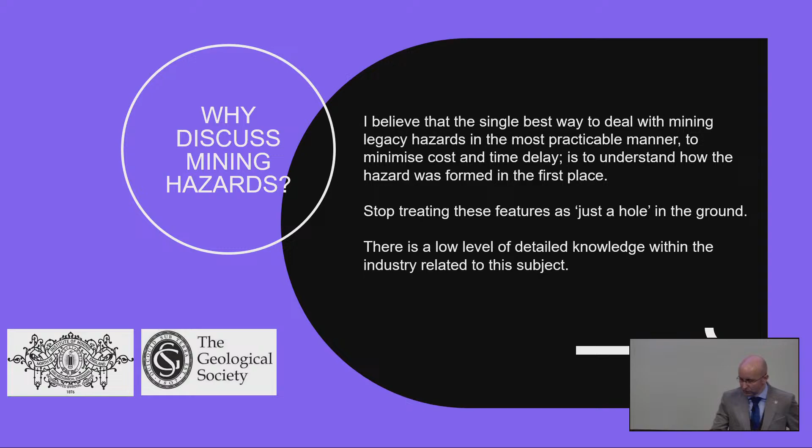Okay, I always start with this. If you've seen me talk before, I always put this quote, at least the one by Galloway, especially as I'm here, because Galloway talks very fondly of this part of the world. Essentially, we wouldn't have the modern world were it not for coal mining. I won't read it out, but I think a lot of people forget that.

I gave a talk last year, perhaps about 18 months ago, in Leeds. Very similar talk to this, so I apologise if you were at that one, you're going to get the same one again. At the end of the talk, two young people in the profession came over to me and said, that was a really interesting talk, Scott, thank you for that. Loved looking at the plans, very interesting, but why is this such a big deal? And I kind of said, what do you mean?

They said, we don't get this. You've been talking about coal. Was coal a big deal in this country? Yeah, you see, but you laugh. But then think about it. That means we've got a generation of people joining the engineering community who don't understand the significance of this.

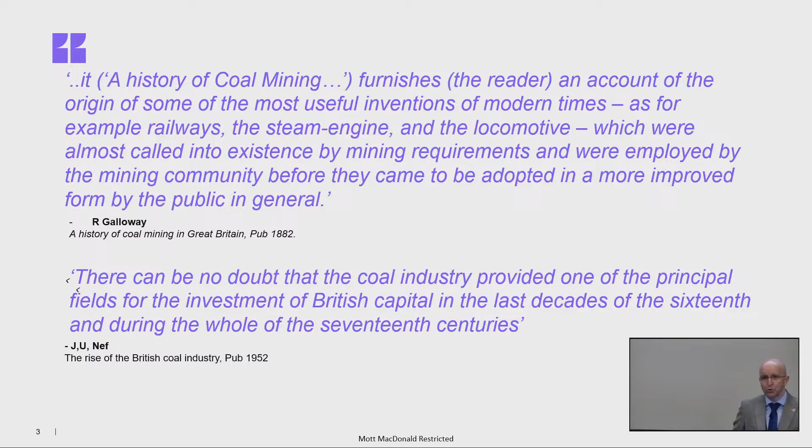And I know I never worked in a mine. I was never trained as a mining engineer, but I've tried to pick this up, and I think we need to remember that when we're looking at problems. I'm sure there's consultants in the room who deal with clients, internal colleagues and peers, who struggle to understand what we're talking about and why this is such a big issue.

And I'm very conscious of time. So a few... oh, is that me again? Ooh, brave. So UK mining dates back to the Neolithic.

I won't go through all of this here. I think there's a few important things we need to talk about on this slide, which is that coal mines started as surface winning or small pits and then progressed. And really, as I'm sure most people know here, it was the Industrial Revolution that really got coal mining going in the UK.

In addition to coal mining, there are other minerals that were mined, and it's important to remember, and I'll try to touch on this later, that there were other minerals and other materials mined with the coal. So when we're talking about underground mining, we might not just be talking about the thickness of coal that you can see on a geological map.

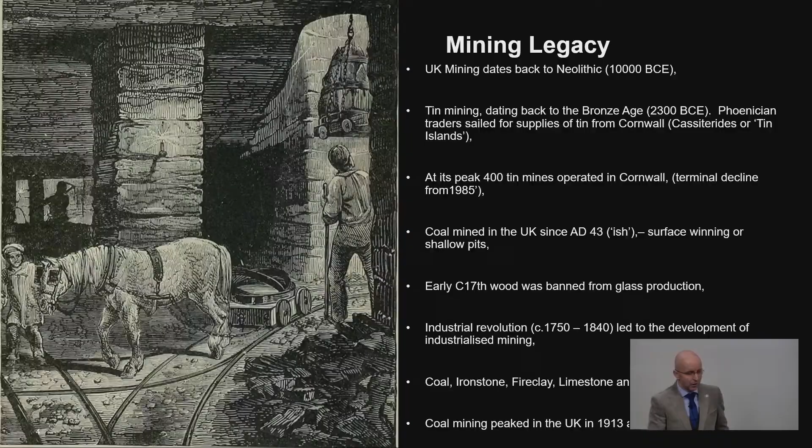Okay, so it was a long time ago, but what sort of hazards?

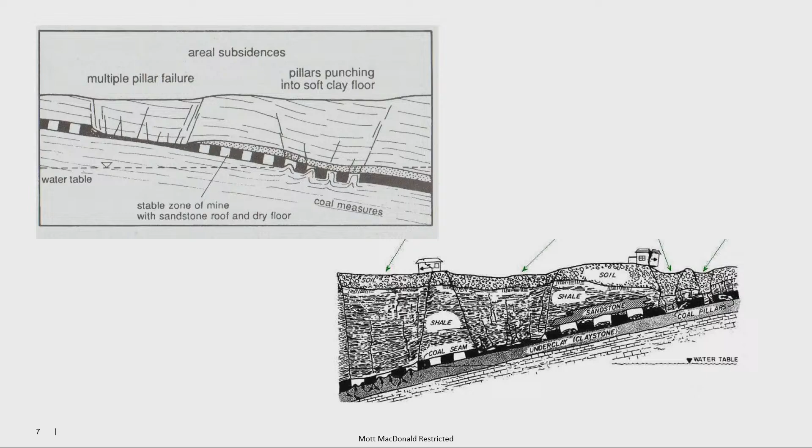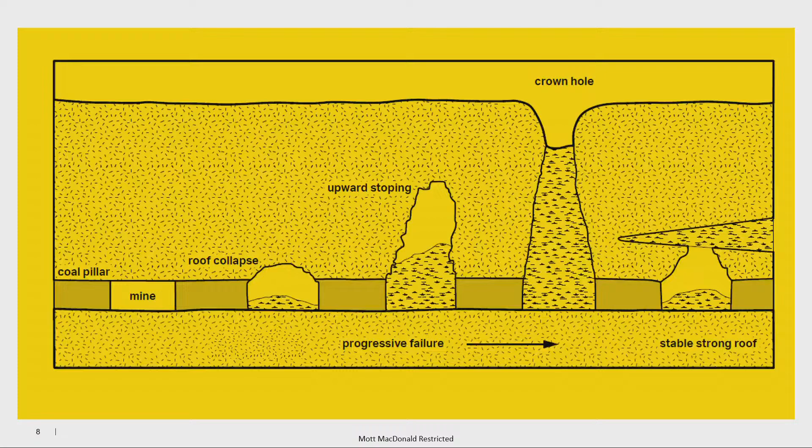Again, just to illustrate the point further, crown holes - this is what a lot of people in the industry think about. Crown hole failure is what a lot of people in the industry, in consulting, that's the immediate go-to when people talk about mining subsidence. It's this sort of manifestation, something that is relatively small, very localised, and potentially a lot easier to deal with than some of the wider subsidence troughs that we saw on the previous slide.

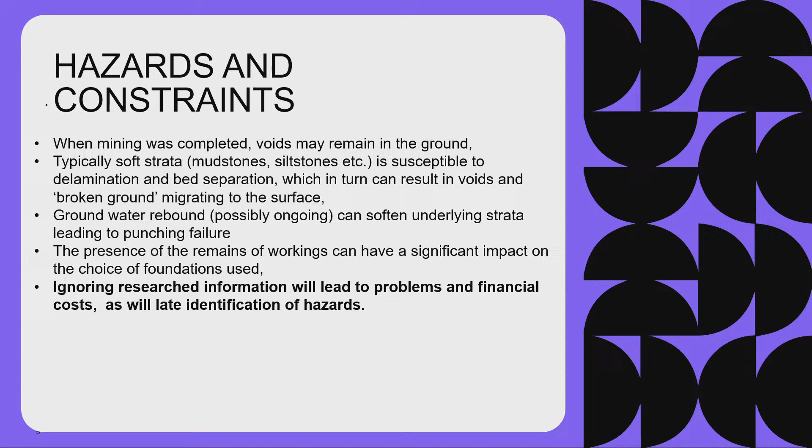So just from the previous slides, we can say that when mining was completed, voids may remain in the ground. We've got a water table on that bottom image - actually, we've got a water table on both images. And it's important to consider that.

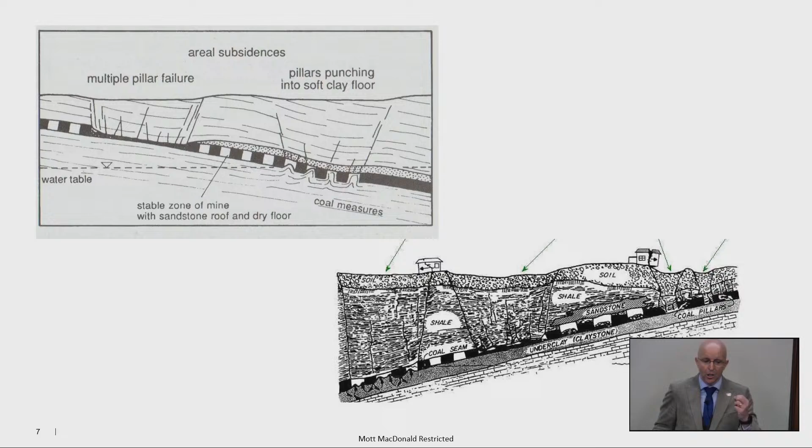One of my interests is looking at old mining textbooks. I'm convinced that if we read the old textbooks about how to actually drive these mines, and I'm talking as old as I can possibly find, we can understand what we're looking at as engineering geologists, civil engineers and consulting engineers, and we can try and work out how best to investigate them, where best to put boreholes, where not to put boreholes, where subsidence may be at its maximum point or where it may not have occurred at all.

And so what comes across in a lot of those textbooks, which is something that I perhaps hadn't really thought about until I really got interested in this 5 or 6 years ago, is that as an engineer, I was always told that mining subsidence was about the roof coming in. And that's not the case.

It seems the large majority of problems with mines, especially in pillar and stall workings, was the floor coming up rather than the roof coming down. That problem would have greatly increased where we've got the water table.

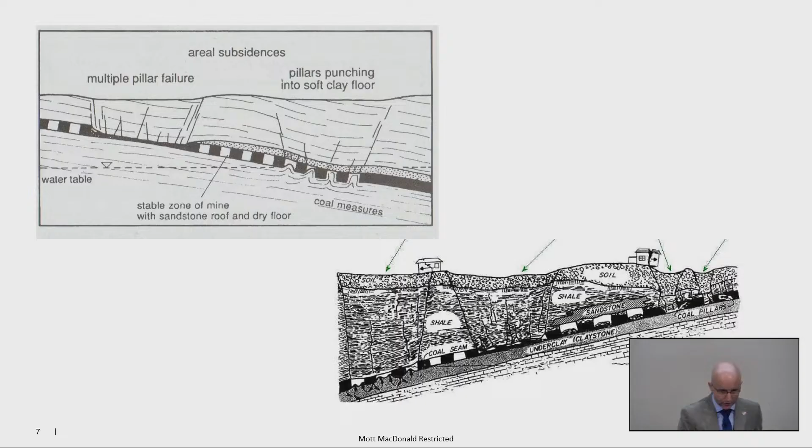Obviously where we've got the water table and we lower it through artificial pumping, that problem goes away temporarily. We switch the pumps off, the ground responds, we get a ground response. This will run through the thread of the talk.

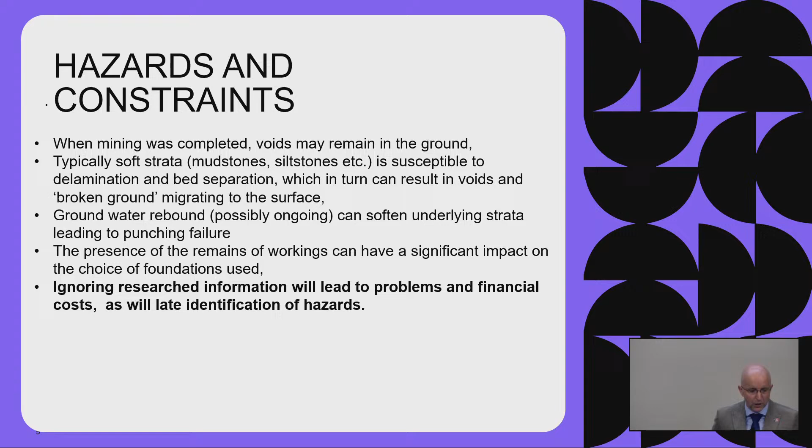Has that ground response completed now? We finished mining a long time ago, predominantly in this country, but we're now seeing groundwater rebound, and I think there's a chance we might start seeing problems we haven't seen before, associated with that groundwater rebound. An obvious point, but the presence of workings will have a significant impact on the choice of foundations, for better or for worse.

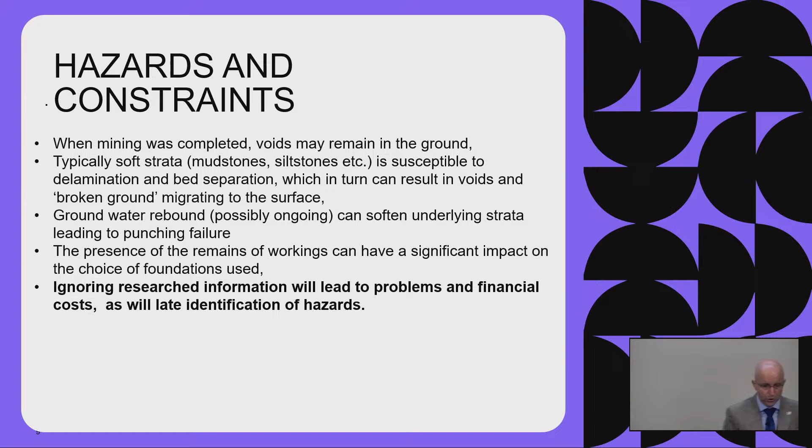One of the first takeaways for this evening, if this is something you're unfamiliar with, is that if we ignore the information in front of us that we can go and research in these sorts of environments, with these geotechnical and geological constraints and hazards, they will come back and bite us. That's been proven on numerous projects over many, many decades.

This is the common thing in consultancy: we've got 10 times the seam thickness, it's not a problem. There's some mining there, we've got enough thickness.

So if you're not aware of the 10T rule, I'll come on to it later on, but essentially there is a rule of thumb - I know some people in the room might have been present when this was talked about initially - that's been passed through CIRIA SP32 and now into CIRIA C758D, which are essentially the de facto standards for consultants dealing with these issues.

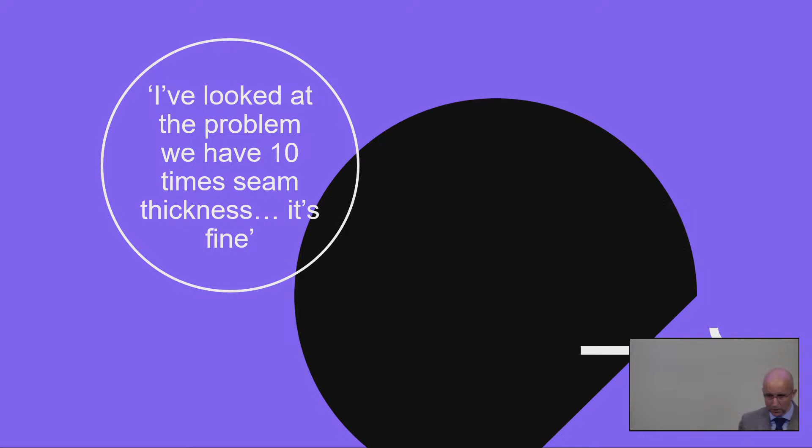That if we have 10 times the seam thickness of coal in cover to the ground surface or to rockhead, depending on your point of view, there's not a problem. I will come back to that.

But before I talk about this - and this is here because I've got nowhere else to put this slide - I can't do this talk without talking about bell pits. So bell pits are the first sort of real underground mining. We find surface coal, we start to win it, we chase the coal into the ground, perhaps going down following the dip of the geology, and then we get into bell pitting.

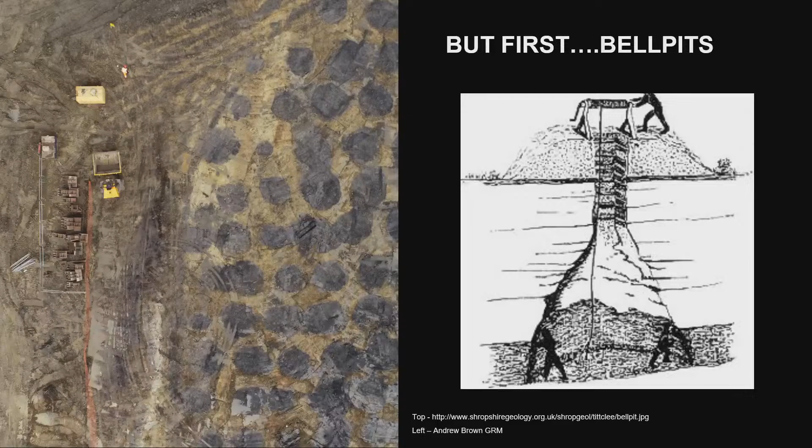But looking at this, you can see the variation in size, the variation in spacing. One of my mentors once said to me that he'd read somewhere that the decision of where a new bell pit would start in relation to the old one was the distance you could throw the shoe when you came out of the ground. Now, I don't know if that's true - I've never seen that written down anywhere, but I do think it's a great story.

Okay, so back on to the thread of things. So let's talk about mining plans. This is just an introduction, and I put this in because I can't find this written down anywhere. This is something that I think should be included as part of geohazard courses in the universities that remain that teach geology and engineering geology. But certainly having this written down somewhere I think would be of great importance.

Myself and Paul are looking at trying to capture some of this for the Geological Society going forward over the next few years. Ultimately, coal mining hasn't always been a requirement to make plans of coal mines. Predominantly, the early plans were made more from a health and safety point of view - so if you were sinking a new shaft and you were going to work a seam, you knew you weren't going to break into your neighbour's seam and potentially flood your workings, which obviously you were trying to avoid.

As mining progressed, and as incidents and accidents progressed, and as various mining legislation came in, there was a requirement in 1872 to make plans and deposit them. My understanding of deposit means that they were taken to London. If you're in this part of the world in 1872, London is a long way away. I wouldn't even like to consider how many plans never got to London, but I'm sure it's a sizable number. So we've got a whole suite of information that we've just lost because nobody took it to London in the first place. It's important to bear in mind, and this is often missed in engineering consultancy in my opinion, there is a difference between deposited plans and abandonment plans.

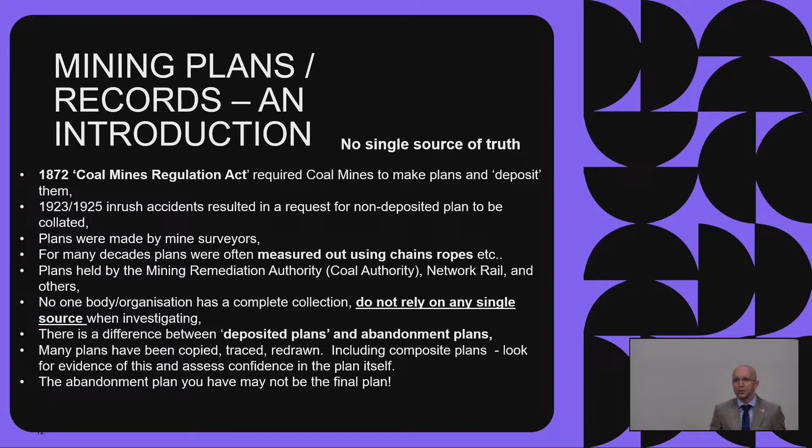And then we start getting into why was that? Well, people could have gone in, there could have been illegal mining, there could have been trespass mining. Somebody thought a shaft was being closed up and they just chanced their arm perhaps one weekend or one evening to go and get a bit of coal for the home fire.

There is an area of coal removed, there are pillars left in place. Depending on where you are in the country, depending on the age of the mine, that methodology may differ. This is why I'd like to go back to the point I made earlier about understanding how the mines were driven in order to understand how to treat them.

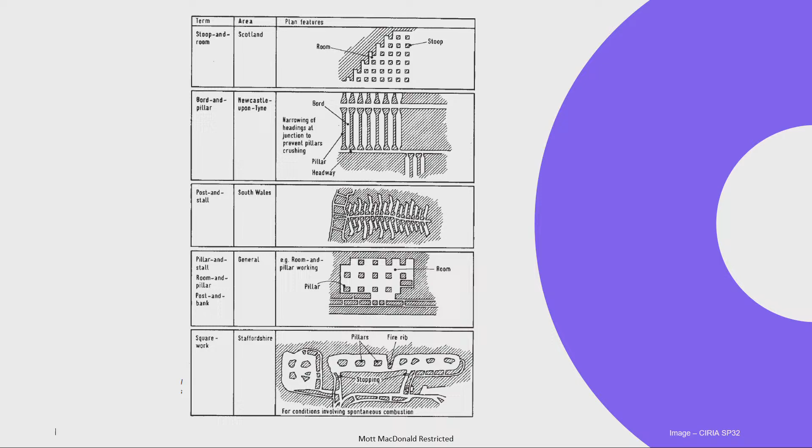Can I interrupt you for a second? Have you ever been in a room with somebody from Sanquhar? No. You have now, there you go. Go on, give us a story then.

It's a mining village, an outlier of the actual coal field. Both my grandfathers worked there. That's fabulous, I'm from Sanquhar.

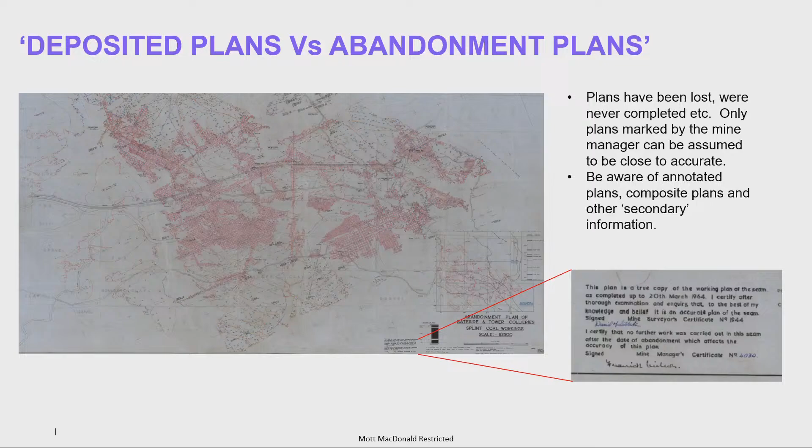Peel, P-E-E-L, goes through how to sink a mine, how to drive a mine, how to work the coal, and how to retreat from the mine. Super book, great book. It's a book that was written for its day, it's a guide for mining surveyors and mining engineers. Fabulous book if you can get hold of it.

So when we're thinking of underground spaces and these mine workings, we need to consider that we've got the workings themselves and then the means of access and egress. And they would be typically very, very well reinforced, even going back pre-mechanisation. Peel has a whole chapter in the book about how to preserve wooden props to make sure they last as long as possible. Fascinating to read, but the point is that these things were built to last. And so I would challenge people who say, oh, it's all right, it was 120 years ago, it's not a problem, it'll all have collapsed. Don't be easily convinced and don't be easily fooled.

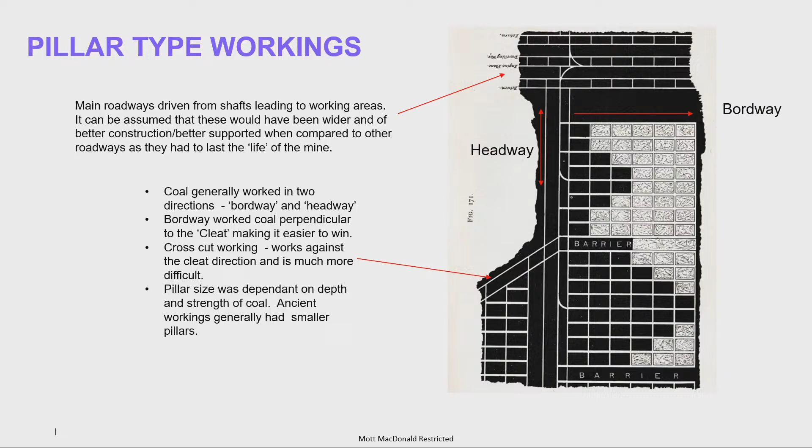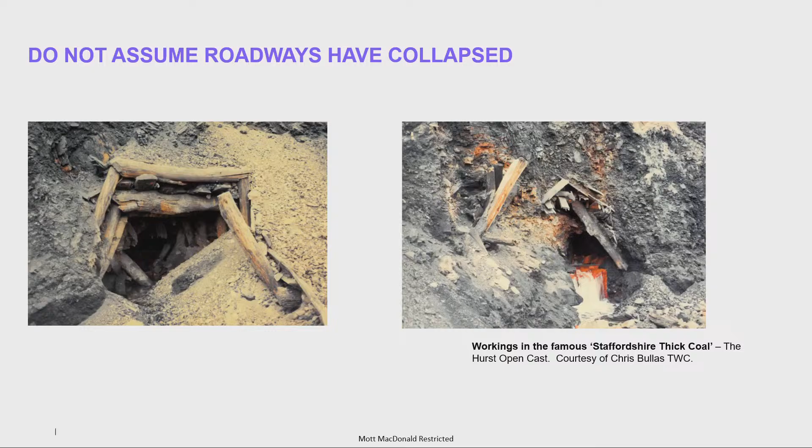Those photos were taken in the mid-1990s in the Staffordshire thick coal. Those are substantial props on the left-hand side. And no, it's not as open as it originally was. But if you were in that area and you were undertaking a ground investigation and you'd missed that with the borehole, and then you proof drilled and grouted or you did something else, that could really come back and get you. So if you've got a plan with a roadway on, think about targeting the roadways in any ground investigation.

So something interesting here that I didn't come across until quite late on is the idea of dividing the workings into districts and having coal barriers between them. This was predominantly to stop fire and to limit the risk of any explosion spreading throughout a whole mine. Again, this is one of those things that once you've got your eye in, it's quite easy to see on the older plans.

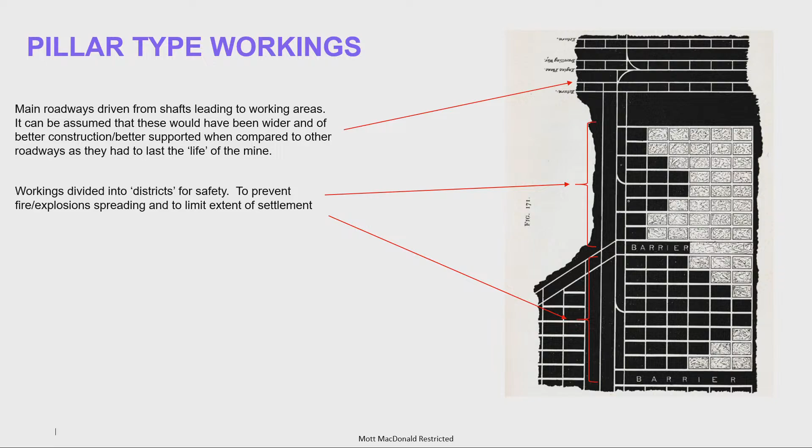I think I've got another shot of that, and again, the workings being packed.

Right, I'm open to discussion at this point, maybe not a long discussion. Pillar robbing, second workings, pickings. For a very long period of time, until quite recently, I considered pillar robbing to be something a bit ad hoc, undertaken to chance their arm, to get a bit of extra coal. I'm now coming round to the idea that pillar robbing and second working are the same thing, that these mines were designed to be reworked on numerous occasions.

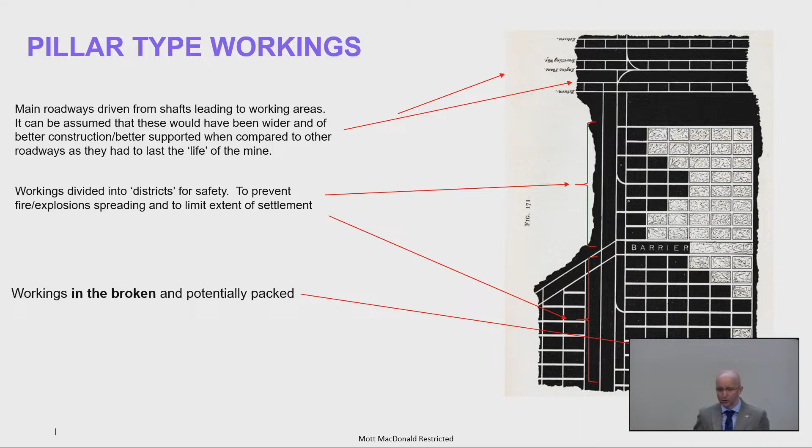We can see it on plans, we can see it on opencast sites - I've got a photo in a moment. So the concept of pillar robbing and second working is that we start off with something that looks like that, and we take the coal out. And then we go back and take a bit more coal out.

In the Black Country, I've got a couple of plans - they're not here because I'm still not 100% certain what I'm looking at. But I think I've got evidence of the thick coal in Staffordshire being worked six times, where you can map out roadways that have gone in, that have cut through previous roadways, that are then cut by later roadways.

So what does this mean from a geotechnical point of view? If we're looking for coal in a borehole, we have to think about the percentage extraction of coal. And I know there was a case, quite local to this, where extraction in a seam was quite an important point. We really do need to think about extraction of coal and how that might manifest itself in any boreholes we take, cored boreholes, and whether we're using cored boreholes versus rotary open holes.

And the quality of the drillers that we use. We need to make sure that we have people on site who know what they're looking for in the boreholes, and make sure that the engineering staff on site know what they're looking for in the boreholes.

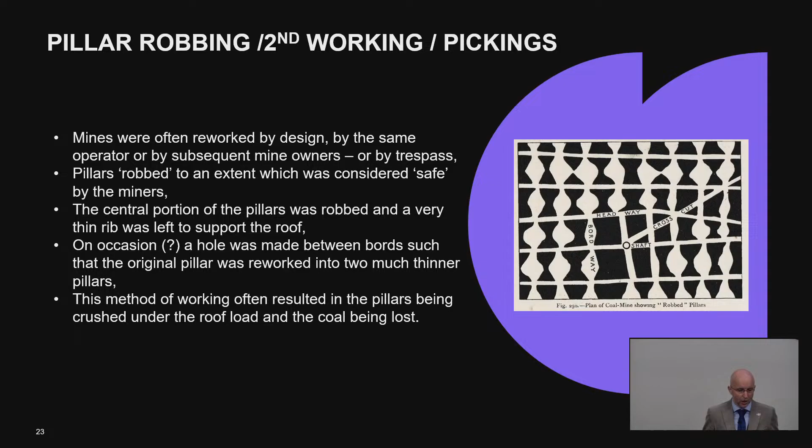I had a site recently in Derbyshire where the mine plans show that the coal has been completely taken out, and that wasn't necessarily reflected in the borehole investigations undertaken by others. Trying to work out whether the plan was correct, or whether the boreholes, which were just open holes, had possibly been logged incorrectly - very, very challenging.

So pillar robbing, second workings, anything like that - if anybody's got any stories afterwards, I'd love to hear them. And just so you know what that looks like in practice, thank you to a younger version of Paul Roberts for this photograph.

What we're looking at here is an opencast site where the overburden's been taken off. We've all seen photos like that before, and yes, it's obvious it's all been nicely cleaned up before they start working the pillars. But the important thing here to look at for me is between the foreground, the middle ground and the background, the change in the shape and dimensions of those pillars and their footprint.

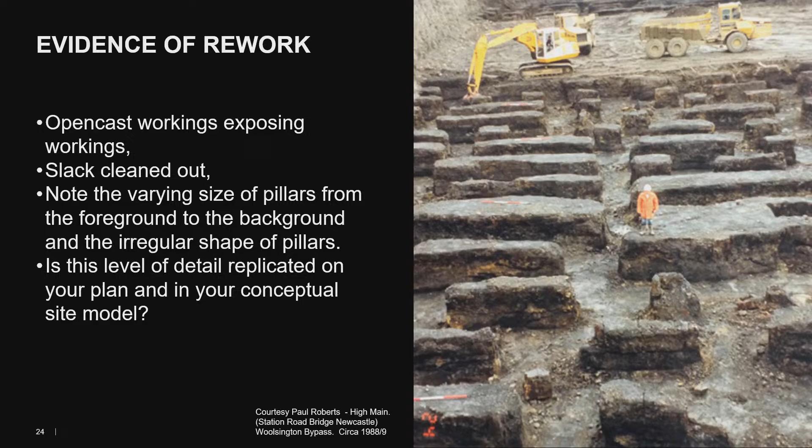For me at the back, potentially some of those pillars have already been taken out. But then as we come through we can see cutouts in the pillars, and we can see those second workings and possibly later workings - this is completely different to what might be on the abandonment plan. We need to think about that when we're looking at borehole records.

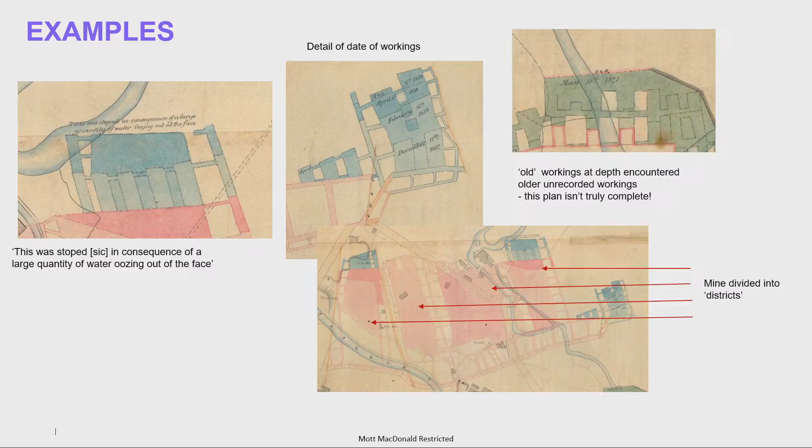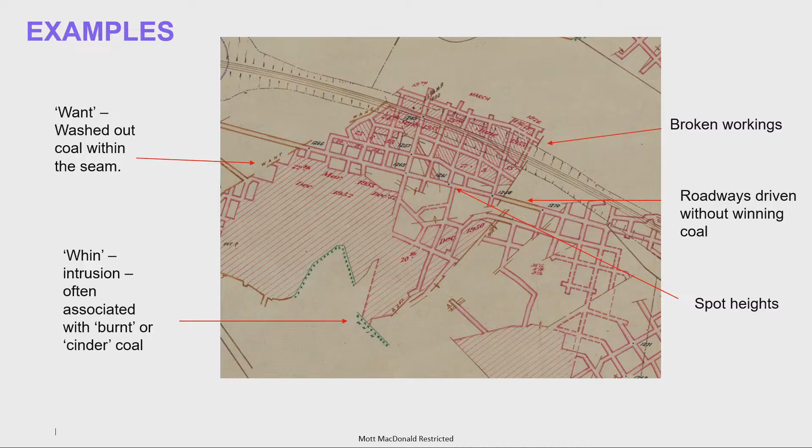At this point I should point out that a lot of this information comes from a very good source, and I haven't got the reference, so I apologise - if anybody wants it, find me on LinkedIn. There is an NCB coal board book for surveyors which describes how to draw these plans, and if you haven't got it and you work in coal mining country, get a copy, because it's the book that is missing from the industry completely. I intend to get a lot of that information republished through the GeolSoc over the next 18 months or so. We can also see a geological intrusion, marked by the green there, and we've got some spot heights.

Lovely plan. I was talking to somebody earlier about this, actually - coal would have been left in places to protect structures at the surface. I have spoken to old surveyors, old miners, and I'm sure people in the room will have an opinion on this, and I'd really like to hear it later, about just how much coal was left in some of these pillars, and whether a few pillars may have ended up being a little bit smaller than perhaps they're shown on plans.

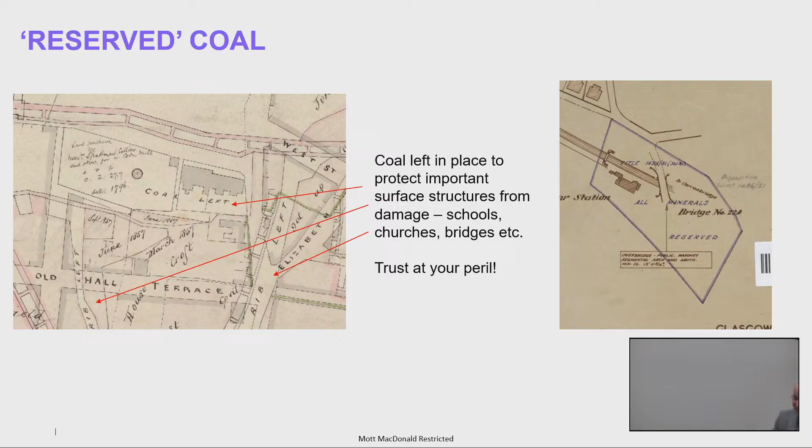I can say it because it's not here, but I live very close to Himley Hall. Himley Hall in Staffordshire was the NCB headquarters for a number of years. The abandonment plan for Himley Hall has the historic church where I got married on it - it's on my wall at home, much to my wife's annoyance. But what it does show very nicely is a massive pillar underneath Himley Hall. I was talking to one of the surveyors who worked at Baggeridge Pit, which was the largest pit in the area many years ago, and he said to me, 'oh, we took most of that pillar out.' And that was the Earl of Dudley's coal mine. It was just so fascinating - again, I'd love to talk to people about that if they've got any experience.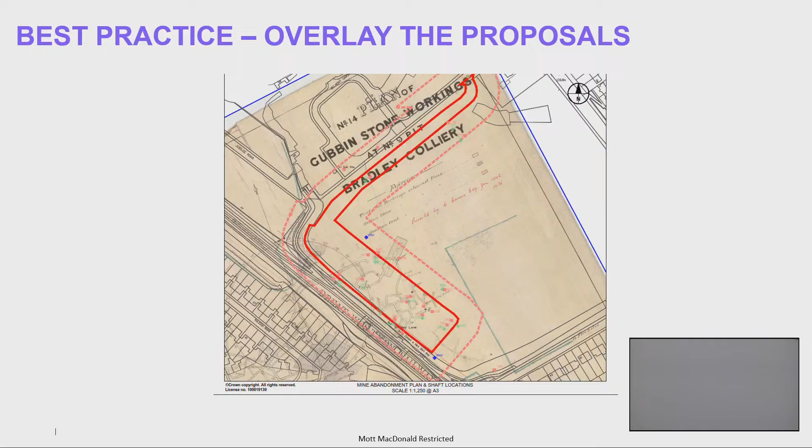This is great, but what do we do with it? We've got plans, we can interpret them, we've talked about GI, but what else should we be doing with them? We should be overlaying whatever we're going to do at the surface to try and get a better understanding. This is a great plan - I should credit this as an ACON plan, so thank you to ACON for letting me use this one. We can see workings underneath the car park here. They don't extend over the full footprint of the car park, but they are there and they need to be considered.

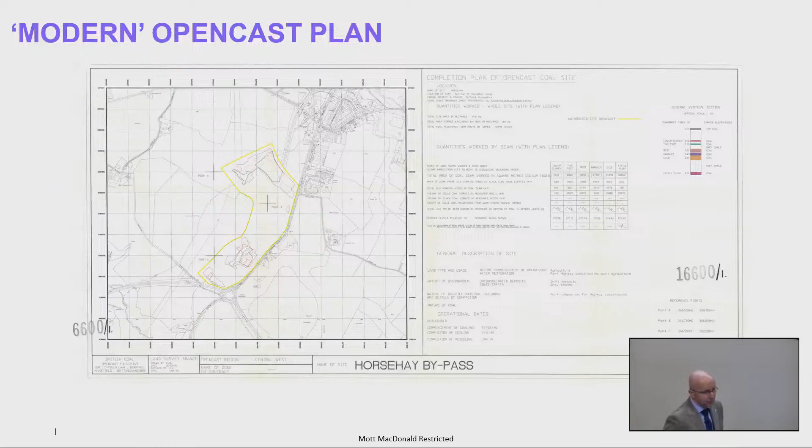Then we move on to modern open cast plans. This is in the Telford area, and we can see an open cast site - if you've not seen one of these before, the little polygons within the yellow site boundary are workings that were encountered at depth in that open cast site. It is possible, if you're really nerdy and really interested, to get one of these plans, try and find the corresponding seam plans, and see how they compare to what was found in the open cast. If you can get it to match, let me know, because I've never managed to get it to match so far.

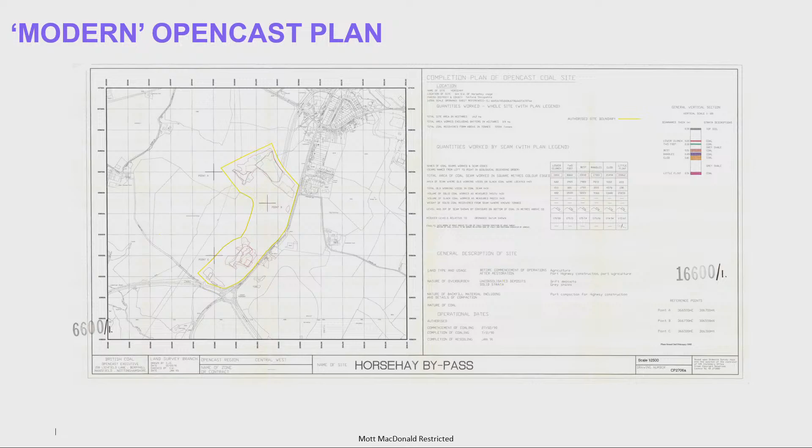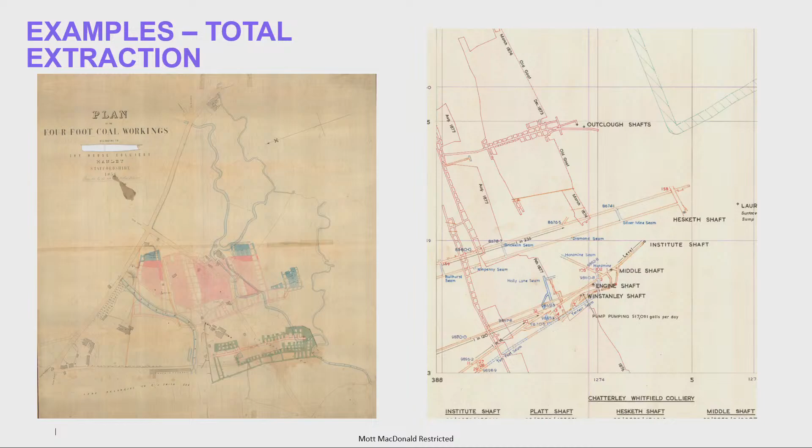That's just the same slide again, so I won't go over that one.

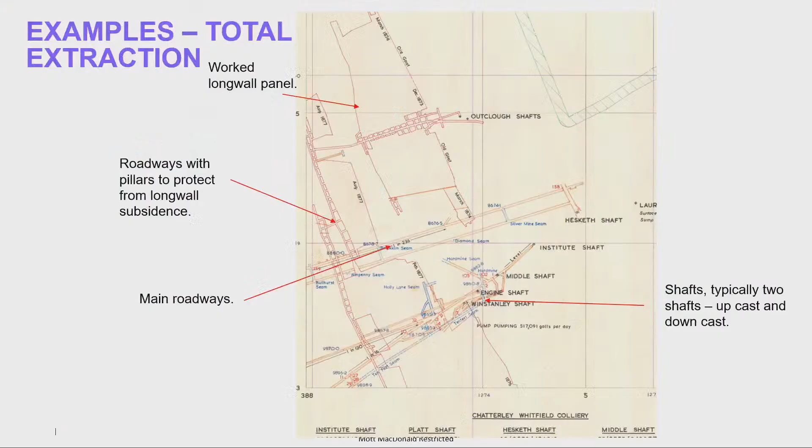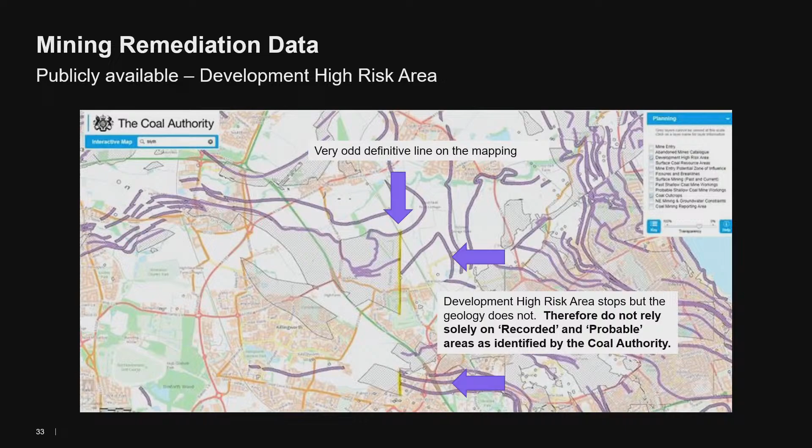There we go - so the development high-risk area stops. Now, as geologists and engineers, we can all see that's probably not the case. I've got to defend the Mining Remediation Authority here, because this is a wonderful resource, and they don't purport to know everything. But this is quite clearly where their records stop. It's important to bear that in mind - you need to look at the holistic area when looking at some of these problems, and really consider what the problems might be. Because it would be very easy to interpret this and say, I don't need to do anything on this side - if I'm on the right-hand side of that yellow line, I haven't got a problem. It's fine.

Right, this is where it gets fun - the 10T rule. This is, in my opinion, a blanket approach to assessing the risk of mining voids reaching the surface. Now, I should stress before we get into this, anything I say here is really only in relation to workings other than longwall workings. There's a discussion to be had about longwall workings and the 10T rule, particularly pre-mechanisation longwall workings, where perhaps collapse and closure didn't occur quite as well as it should have done.

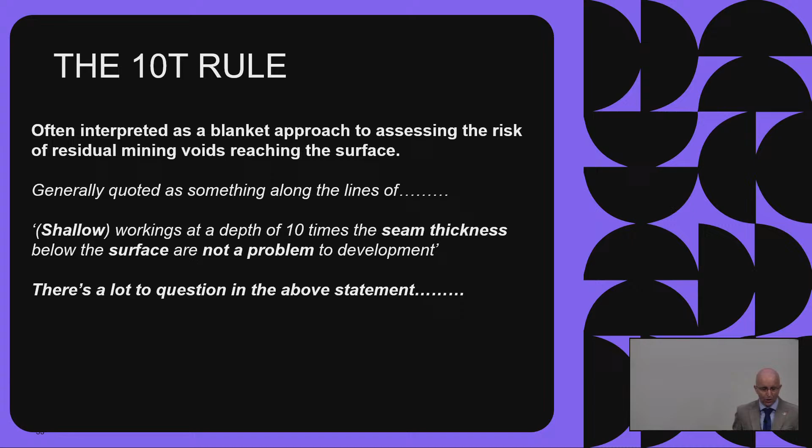Generally, the 10T rule is quoted as being shallow workings at a depth of 10 times the seam thickness below the surface are not a problem to development. So from that, I'd like you to think about shallow workings, seam thickness, and below the surface. So what's shallow? The Mining Remediation Authority classes shallow as being 10 times the thickness of a coal seam, down to a maximum depth of 30 metres from the surface.

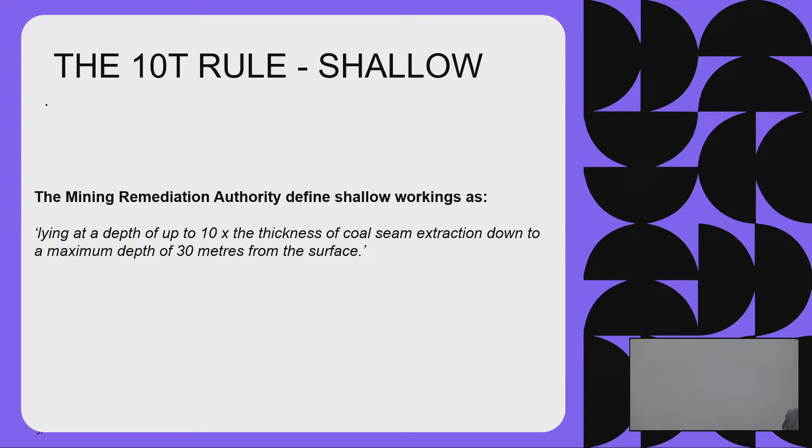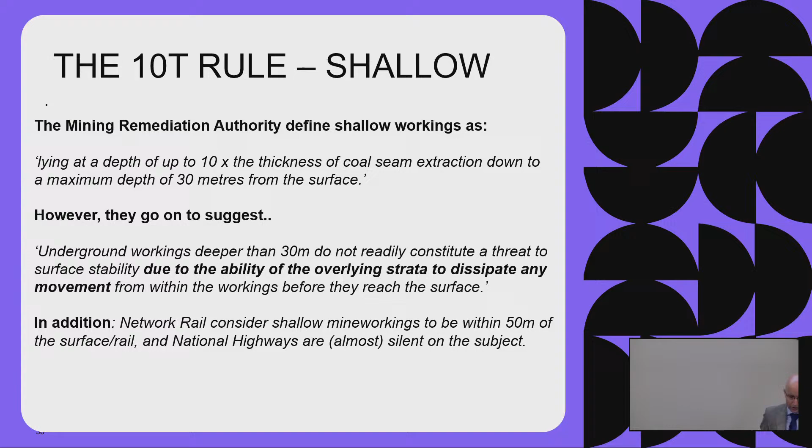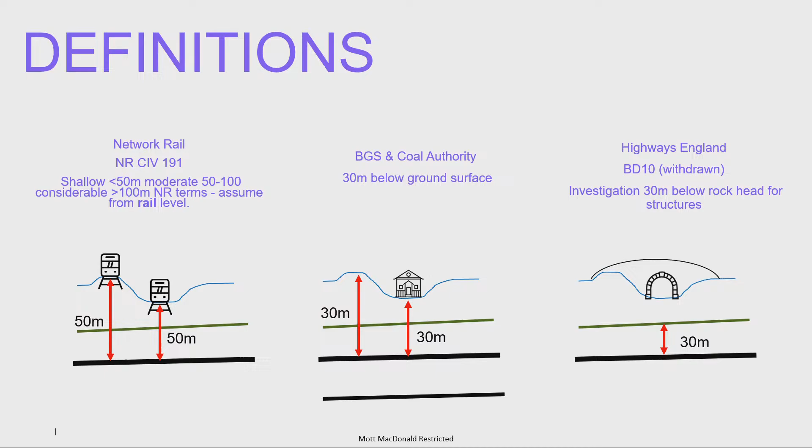They go on to say that underground workings deeper than 30 metres do not readily constitute a threat to surface stability, due to the ability of the overlying strata. Network Rail consider a slightly different number, 50 metres. So we've got shallow workings defined by three different organisations, all different. So that's confusing, isn't it? And I particularly like the Network Rail one, where we have to think about what we're doing with embankments, and where does an embankment get big enough to actually be a problem. I haven't got an answer for that, to be honest, but it's something we need to be thinking about.

This is something that has come about from much debate and looking at old books and discussions within my peer group, who all like this sort of thing. Worked thickness, the seam thickness. So if you're a geologist starting off, if you've never done this sort of assessment, you read that previous statement and it quite clearly states the seam thickness - that's the number you need to be thinking about. So in most cases you'll go to a BGS map, look at the seam thickness, and do a 10T calculation. If your seam thickness is fairly minimal, you've probably not got a problem.

But what people forget repeatedly is, if we go back to those pictures of the timber props and the open workings - yes, let's mine a 30 centimetre thick coal seam, great, but you've got to get there. And that's the bit that gets missed time and time again. So we've got a 30 centimetre coal seam, we've sunk a shaft, we've driven an adit to get there, however we've got there. We then want a stable means of relatively long term getting to the working face and back, pushing a cart. I'll come on to the cart bit in a minute.

So how big is the working? We've got a reinforced section of the seam that has got timber props, stone props, or a combination of the two, holding everything up. We need to take that into consideration, especially if we're doing remedial works, because if we drill into that roadway and it is still stable, it will take a lot of grout. And equally, some coal seams may have had two roadways at different levels - that's worth thinking about as well.

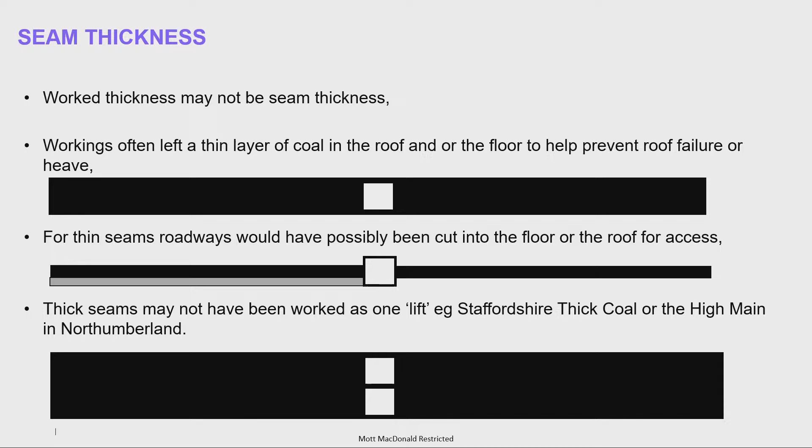So how big is a roadway? Now, a lot of this I need to thank Keith Nichols, ex of Network Rail - Paul's chuckling because this is one of his slides. I describe very crudely the height of the roadway as being the height of your wife pushing a tub. I know that's a bit humorous, but I think that's fairly close when we're talking about old workings, and it's borne out in some of these images we can see.

So we've got the miner at the face doing the mining, and his wife pushing the cart full of coal to the bottom of the shaft or out of the adit. So surely you would only make the roadway as big as it needed to be to facilitate that - we're probably talking, I don't know... there we go, that's me being a 17th century woman pushing a cart. Something like that, perhaps. But if you've only got a coal seam like that, suddenly your calculation, your assessment has completely gone out the window. Very localised, admittedly, but if you've got a coal seam with a lot of roadways crossing each other, this is something we really need to be thinking about.

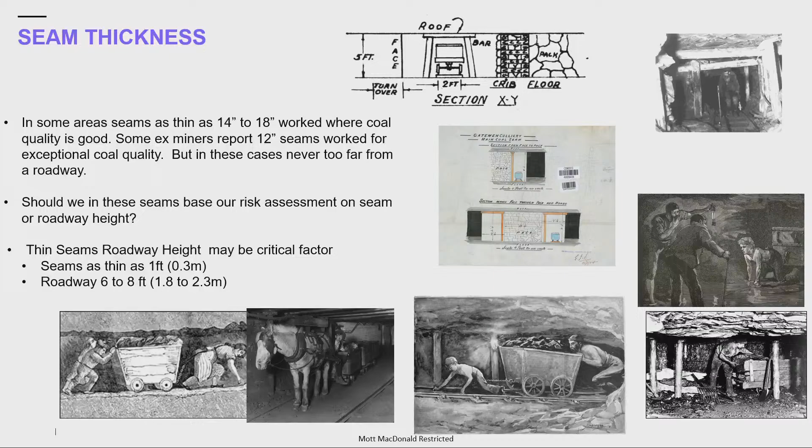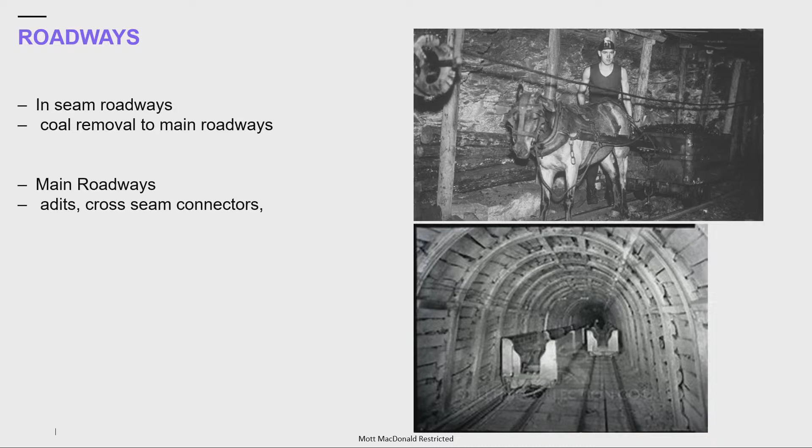And then we get to this level of roadway, and this is, especially the one at the bottom, much more modern, sizable construction, very well reinforced, potentially going to stay open for a very, very long time.

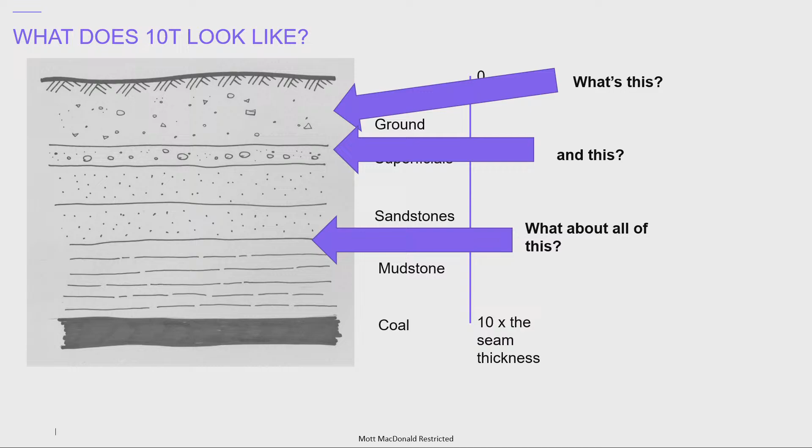So if we go back to a very simple ground model - apologies for the crudity of the image here - we've got a simple section of strata with some coal at the bottom. I did realise when putting these slides together that what's missing is a roadway, so just use your imagination a little, perhaps there's a roadway at the bottom in that coal seam that's a little bigger than the coal seam itself. So we need to consider what the superficial materials are, the interface between the superficial materials and rock head, and then the rock itself when looking at this.

And then we need to think about what we're going to build, and that's really, really important. What sort of foundation - putting aside the tunnel or whatever we've got on the bottom left - what are we going to put into this ground?

Are we going to change the distance between the worked coal seam, the roadway, the foundations, and the zone of influence of those foundations? So suddenly we've got a variation in thickness, variation in the definition of shallow, differing ground conditions, coal seams which may or may not be worked at full thickness, and records and plans which potentially aren't correct. All of this is very vague, and is not something that should have a blanket assessment approach applied to it.

Discuss. What I'd like to say is that we need to keep returning to our desk study, refer to our approach, and if we're on site and something has changed our understanding of the ground, do not be afraid to revisit where we started. My old chemistry teacher used to say the most important word in science was why, and I think that really applies here. We need to be prepared to go backwards and forwards and really test that ground model.

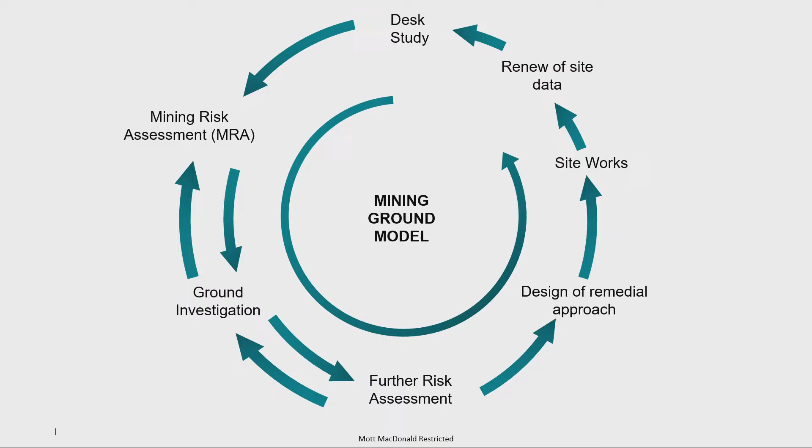Okay, right, pictures of things going wrong to finish on. We're going to finish a little bit, I think, just over the hour, but I think we started a bit late.

So, all very interesting, Scott. You obviously like looking at old plans. This is all old hat. Yep, great, wonderful. What does this mean for me?

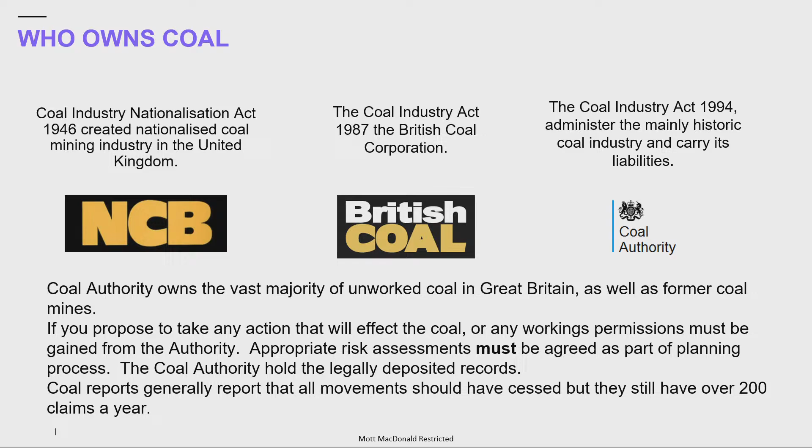So just bear in mind, before we get into the fun photographs, that the Coal Authority, or Mining Remediation Authority as was, owns the coal. If we're looking at other minerals, you might find other mineral owners involved. Because the Coal Authority have responsibility for the coal, they report subsidence claims, and they used to report incidences in a nice little pictorial graphic on the left-hand side. Now, in their annual reports, they just give us a number.

So we've got that information on the right-hand side - I had a member of staff who very kindly went through the annual records from the Coal Authority for many years and totted up the number of hazards and surface claims they came to. You're looking at roughly, maybe, about one a day, perhaps a little less than that, around 300 claims a year. That's interesting, but that's just the claims. The next piece of knowledge we need is how many of those claims were actually coal-related, because some of those things included in the numbers are nothing to do with coal mining. So that's not giving us a true picture of the risk or hazard posed.

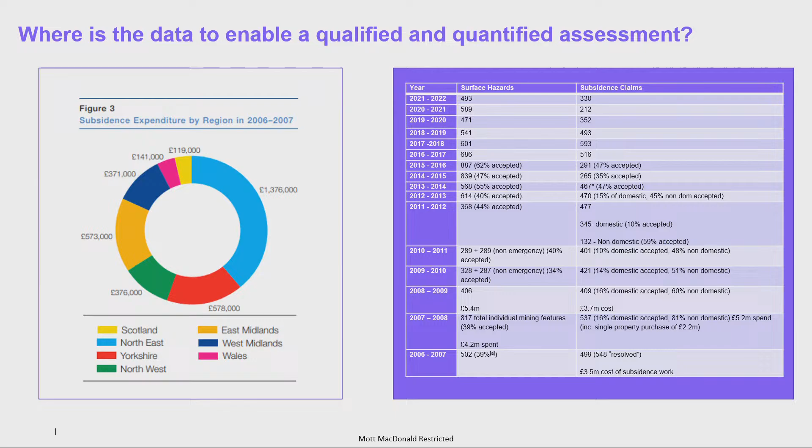But if you go searching on the internet, you've spent your afternoon looking at the Coal Authority viewer, and now you start searching subsidence, you do get a lot of things thrown up. It's fascinating to look at how the industry has responded to the Godstone incident from a few weeks ago. I don't know if they're online, but if you're involved with writing the actual report for that job, I really feel sorry for you, because every man and his dog has given his opinion on the Godstone incident and what could be going on. Best of luck with that one.

Lots and lots of issues. Obviously, if you search the internet, you'll see sinkholes being used as a term when perhaps they're nothing to do with coal mining. But a lot of headlines, and they're very easy to find.

I don't really need to remind anybody here about Bayfield, but this is a slide that's always in this talk for me, because I think it's fascinating. I know several people in the room were involved in the aftermath of this. Terrible, terrible site, terrible problem. I won't dwell on it here, but ultimately reconstruction costs of 3 million - not an insubstantial number for Bayfield, where houses had gone up, people already living in them, when subsidence started to occur post-construction. Terrible, terrible site.

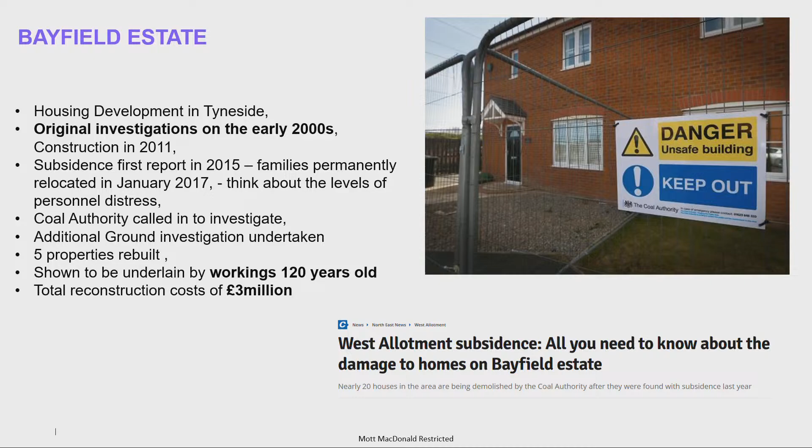Again, exposed workings. This is a site I went to in Stoke-on-Trent about 25 years ago. The site had been subjected to a drilling and grouting scheme. There was a weekend of heavy rain, and suddenly things started opening up - crown holes developing, the road surface going all over, the whole road going up and down. It turned out the drilling and grouting scheme perhaps hadn't really been designed for the ground conditions encountered. It had been designed by others.

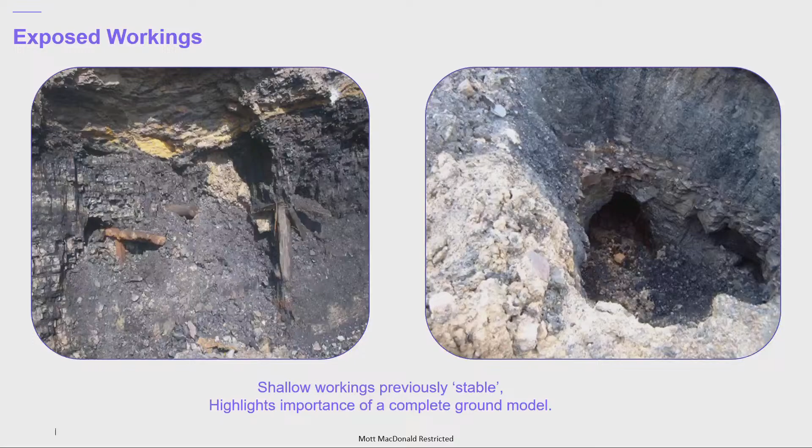It was a historical scheme picked up by the client. The photos on the left show that in a road cut, to try and understand what was going on, we did some trial pits and broke into workings. These were within 10, 12 metres of the surface, and they were still open. If I'd have been foolish enough, I could have walked into that about a minute before it looked like this - it actually collapsed as I was getting my camera out to take a photo, which is a bit of a shame, but you get the idea. You can see the coal exposed there. And then we've got the same photos we've seen before, in the thick coal in South Staffs.

These were workings within 30 or 40 metres of the surface. Something that interests me - if anybody's got experience or thoughts - is that in this instance, second workings have gone in, a whole section of coal has gone out, and the ground has responded almost immediately. The letters were dated a couple of days apart. So we've got workings from 30, 35 metres moving to the surface within 48 hours. So what does the ground look like between ground level and those workings? Has it dropped as a block? Has it deformed as it's dropped? Is it somewhere in between? Could I put piles into that block of ground? Could I dig shallow foundations? These are all the sort of questions we need to be asking.

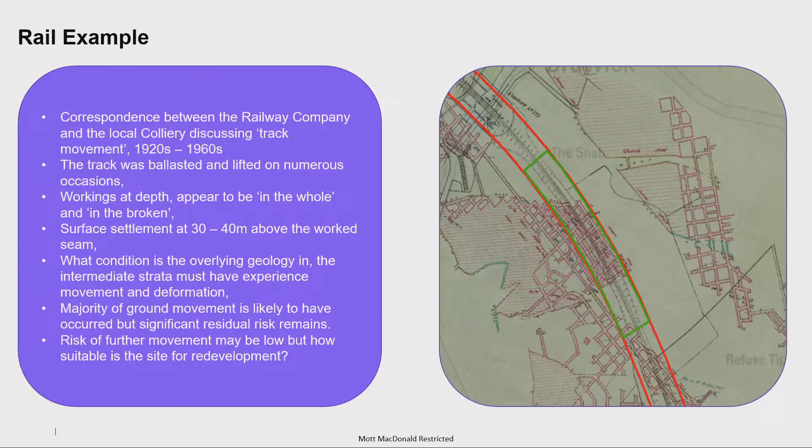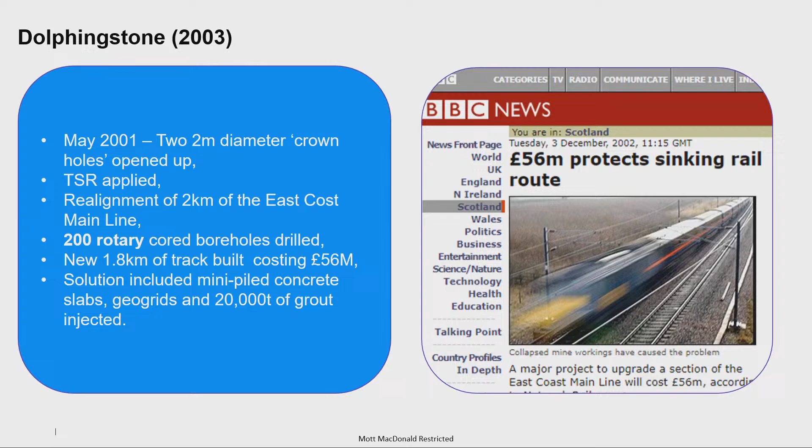Dolphingstone - I must admit this one passed me by at the time, but there are significant numbers associated with it, on the East Coast Main Line. Look at the numbers - 200 rotary core boreholes to investigate this, a significant piece of investigation. I've got no idea what was known about here prior to this, and in defence of Network Rail, I've never actually asked them, but it's a fascinating site.

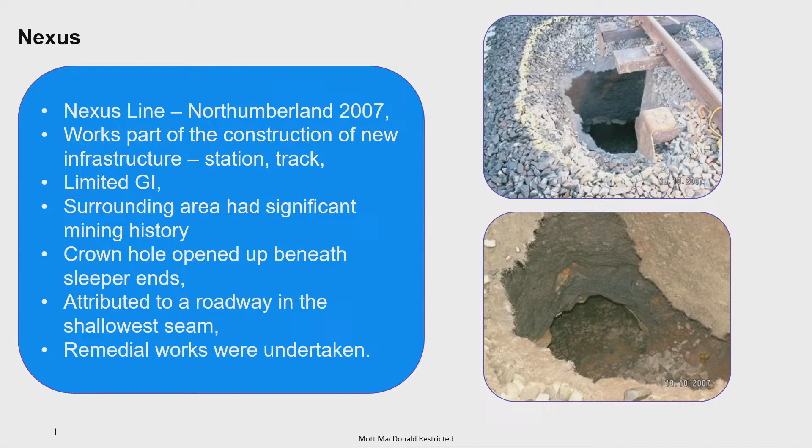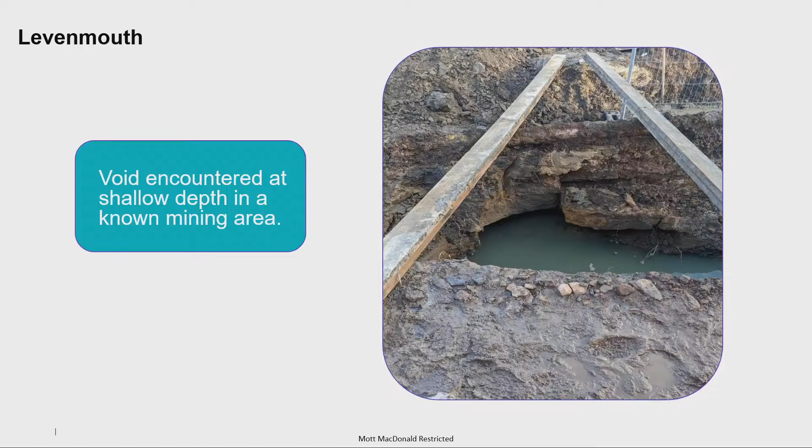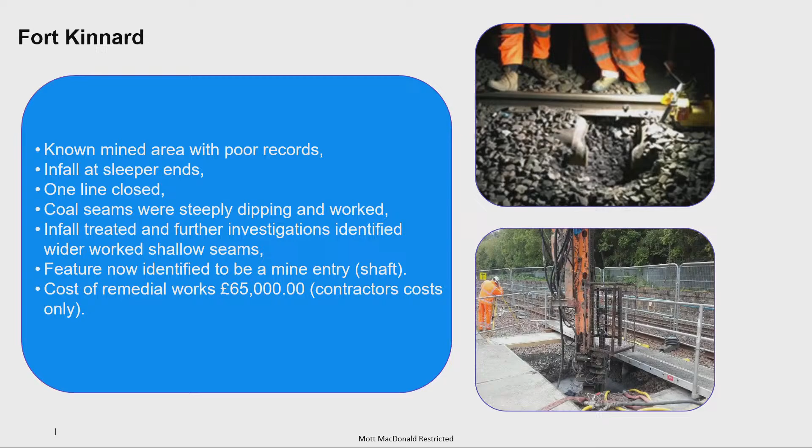A bit closer to home, on the Northumberland Metro, the Nexus, in 2007, there was a problem that needed drilling and grouting. Levenmouth, this was a couple of years ago - again, machine on site, no prior knowledge, bucket into the ground, straight into mine workings. Fascinating. Fort Kinnaird, more recently, a crown hole appeared underneath some sleepers. I apologise for a lot of these being rail related, but a lot of my experience has been rail related - if anybody wants to give me case studies to broaden the portfolio, they'll be gladly received. There are many others we could talk about where mining has become a problem.

And I'm going to finish on that because I'm hoping we can have a bit of a discussion.

I didn't want to put up reams and reams of conclusions, but essentially if all you take from this, if you work in consultancy, is that workings are in various forms and conditions, and the conditions on the plans may not be the conditions in the ground now - they were plans drawn 50, 60, 70, 100, 120 years ago. Do not trust them. Avoid blanket assessment approaches - I'm hoping I've explained why that is. Use multiple sources of information and check that model time and time again. And if anything comes up that doesn't agree with your model, do not be afraid to go back and revisit your understanding. And on that, I'll say thank you.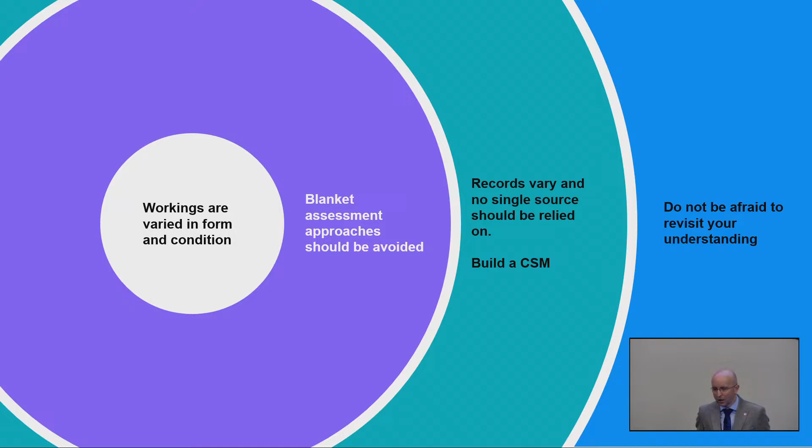Brilliant, thank you very much, Scott. I appreciate you said a discussion, but I must admit I'm terrified of this bit, because I knew I was coming to talk to some geologists. I didn't realise I was coming here, and the esteemed people that would be in the room.

There we are, we'll start with Norman. Norman, I've been dreading you asking me anything. Why don't you tell me, Norman, because your opinion is probably... No, I'll be delighted to help you in any way that I possibly can. Thank you very much. Away from this meeting, I would spend as much time as you like trying to enlighten people on mining in general, because that's what's lacking.

I'm very, very sad at the moment to see the lack of knowledge taking place by people working in the mining industry, and that's where the Mining Remediation Authority needs to take account. The mining is continuing, there is ground movement taking place throughout the whole of this area, and it is not being monitored properly. Since 1963, the Ordnance Survey have not carried out any contouring by proper detailed levelling, and as a consequence we are missing huge areas that are currently on the move.